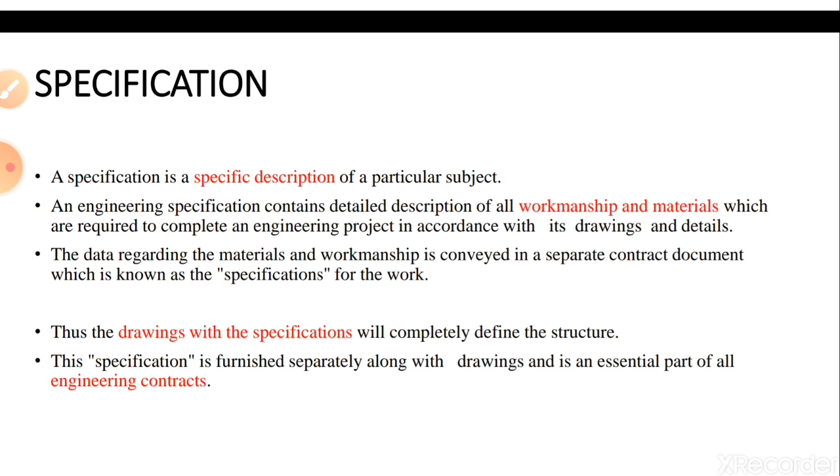So let us see why the specifications are required, or what are the necessities of the specifications.

First, the cost of a unit quantity of work is governed by its specifications. For each and every item, we are going to calculate the rates, and that is called the item rate of a work.

This item rate will be in terms of meter cube, sometimes meter square, sometimes in meters. And to calculate these item rates, we require a detailed specification for that work.

For example, if it is a cement concrete bed, the first thing required is the proportion. What is the proportion required for this bed? Whether it is 1:2:4, or 1:3:6, or 1:4:8.

Because for each and every proportion, the quantities of materials will change. If it is 1:2:4, we require more quantity of cement, whereas for 1:3:6, the quantity of cement will be reduced.

As the quantity of cement is reduced, the cost is also going to reduce. That's why we should clearly mention what should be the proportion.

Secondly, we have to give the thickness of the concrete bed. Again, if the concrete thickness increases, the quantity of cement and other materials also increases.

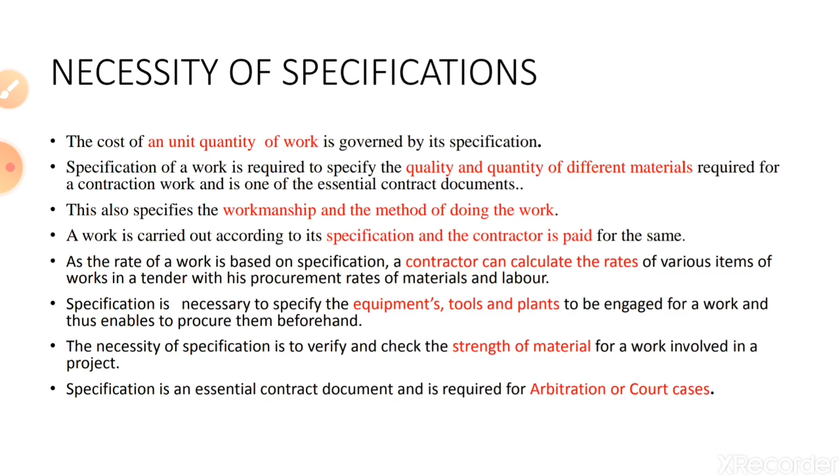That's why specification becomes an important document for any type of construction. For government projects, they will prepare the specification beforehand and give it to the contractor along with the tenders, so it's easy for the contractor. He can study the specifications and accordingly quote the rates, and those who quote less will get the job. That is called specifications.

The requirements for specifications are: specification should be clear and concise. Whenever we write the specification, whatever work should be done should be in a clear format so that the contractor will understand. If you write complicated words or complicated sentences, it is difficult for a layman or contractor to understand, and he will get confused. That's why it should be written clearly and in a concise form.

Whenever writing specifications, we should try to avoid repetition and unusual words so there won't be any ambiguity in construction. Ambiguous words such as 'suitable', 'proper', etc. should be avoided. We cannot write that a company's cement is suitable or not; that should not be written. It should be written clearly what company of cement or what strength of cement is required. Similarly, we should not write that using M20 grade concrete would be proper; that should also be avoided. We have to specify that you should use M20 grade of concrete, so there is no confusion in the workmanship.

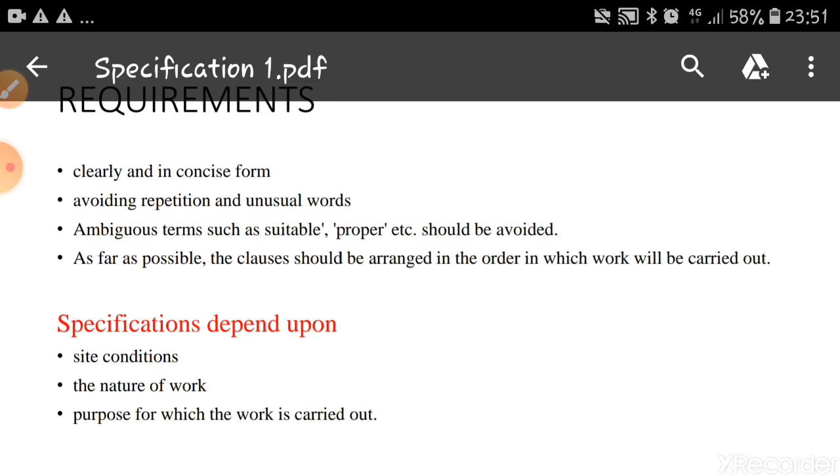The type of specifications. The specifications are classified into two categories. They are called general specifications and detailed specifications.

If you see any tablet or medicine bottle, some information will be written on that bottle - say these drugs will contain this many chemicals and these are the percentages. They are called general specifications. Similarly, whenever we purchase any item from a shop, some small information will be written on the packet - the manufacturing date, what should be the weight of that packet, what ingredients are involved. So they are all called general specifications.

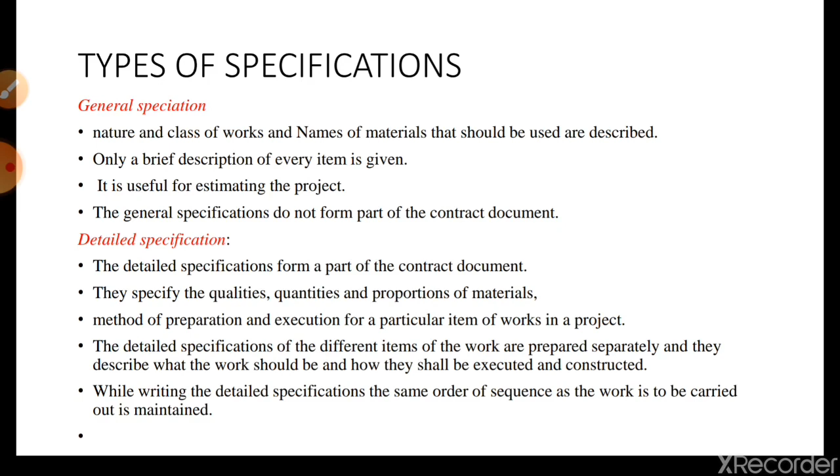They will not tell us how that item or drug has been manufactured, or what process is involved in that manufacturing. So those specifications are called general specifications. In civil engineering terms, general specification means it gives a brief idea about the materials - they will not give us anything in detail. If you see general specifications, the nature and class of the work and the name of materials that should be used are described. Only nature and class of work, say whether it's first class brickwork or second class brickwork. And name of materials indicates what names of materials are used, only that is specified - for example, cement or aluminium or paint. No description of materials is given in this topic. Only a brief description of every item is given, not a detailed description.

For example, if it is a foundation, you can write that first class brickwork in CM 1:6 is used for the foundations. We are not going to write the quality of bricks, the quality of cement, or the workmanship - nothing detailed is written in this. So it is useful for estimating the projects.

Sometimes we have to quickly estimate the project - in that case, these general specifications are essential. General specifications do not form part of the contract document because they do not contain anything in detail. Only a brief description is given here, so they do not become part of the contract document. If it is a part of the contract document, then all specifications should be written in detail. But since only a brief description is given here, they are called general specifications.

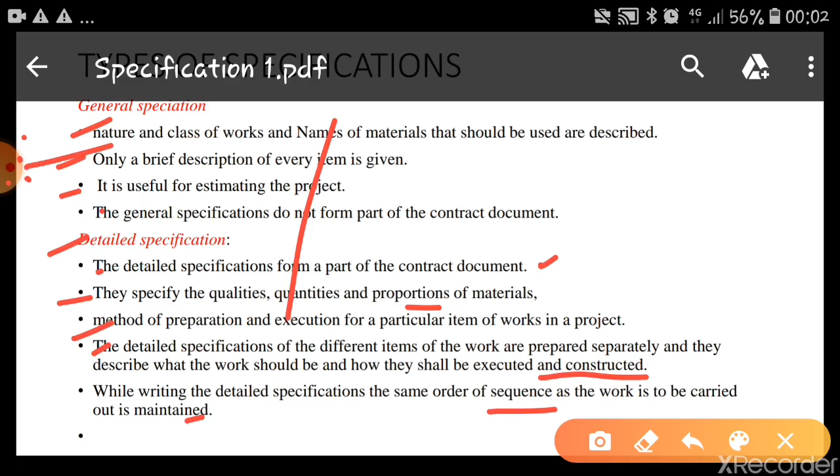Now let us see what are the general specifications of a first class building. Whenever we say it's a first class building, the building is constructed using good quality materials, with good workmanship and good supervision. That is called a first class building.

So when writing general specifications, we know that general specification means only a brief description will be given, nothing is explained in detail. So the construction starts with the foundation.

For foundation and plinth you can write: brickwork in foundation and plinth shall be of first class brick in cement or lime mortar over cement or lime concrete. This itself is enough for general specifications. We don't have to mention in detail what proportions are required for the bed concrete or for the brickwork; only briefly, within one line, you can finish the foundation and plinth.

If it is filling, then foundation trenches and plinth shall be filled up with coarse sand. If you are writing the detailed specification, you have to write the type of sand required, how the filling is done in different layers, and how it is compacted and consolidated. But in general specification, just one line: foundation trench and plinth shall be filled with coarse sand. That is sufficient.

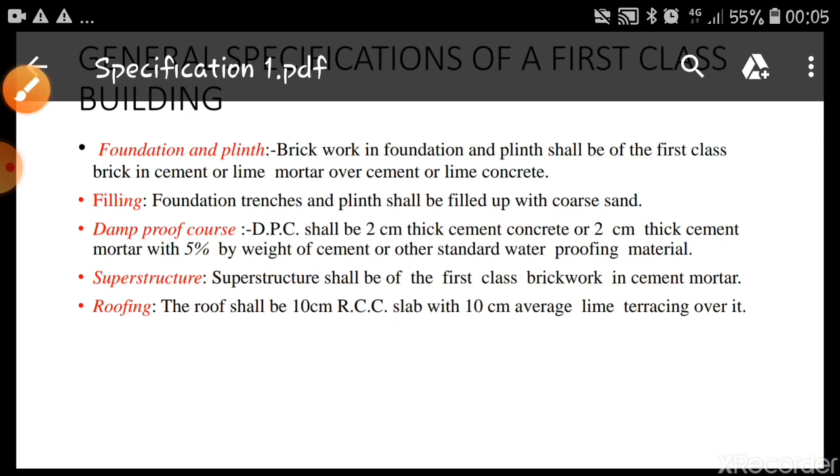Then if it is flooring, mosaic flooring shall be provided in drawing room, dining room, bathroom and water closet. Bedroom floor shall be colored and polished. Again, we don't have to write what type of mosaic is used, how it is laid, how many polishings should be done, or how many days of curing—only one line.

Similarly, finishing: inside and outside shall be 12 mm cement plastered. The inside of dining and bedroom shall be distempered and the rest whitewashed 3 coats. The outside shall be color washed over 3 coats of whitewash.

That itself is sufficient. For doors and windows, frame shall be seasoned teak wood and shutters 3 cm thick teak wood panelled. Brass fittings shall be provided. Doors and windows shall be varnished and French polished.

And the last one is miscellaneous items: rainwater pipe shall be of asbestos cement or cast iron finished with paint. All sanitary, water supply and electric fittings shall be of first class materials.

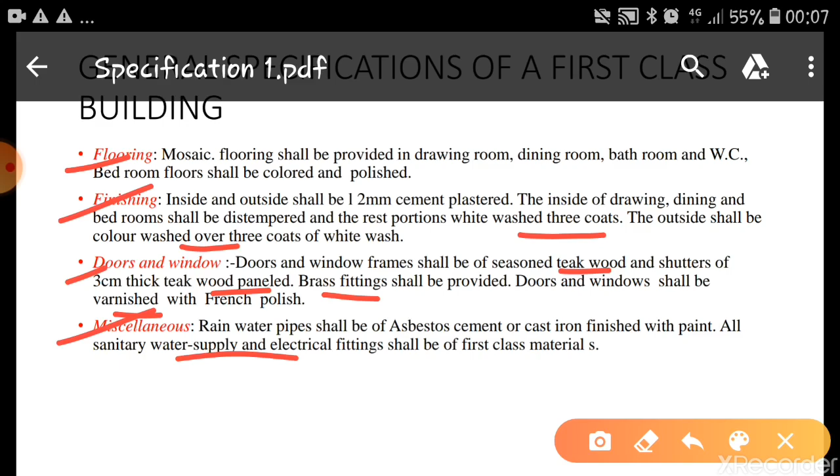So these are the general specifications for a first class building, because here all the materials used are of supreme quality. Whereas if you go for a second class building, the quality of some materials will reduce. Instead of teak wood doors and shutters, we can use some other wood like jack wood, or replace them with aluminum or other materials. Instead of mosaic or tiles, we can replace it with some other tiles. So slight changes will be there in second class buildings, and they are normally called the general specifications of buildings.

As we have seen the general specification of a first class building, now in the specifications we have to write about the quality of materials. Let us see what we can write about the materials. Let us start with the first class brickwork.

When we say bricks, there are different qualities of bricks available. Some bricks are called first class brick, some are second class, where the quality, size, and strength of the bricks will vary.

Whenever we say about the first class bricks, then bricks should be molded from good earth, free from all traces of salt. Should write this point clearly. Whatever brick should be molded, it should be from good earth, and it should be free from salts.

They should be of uniform deep red and copper color, thoroughly burnt without being vitrified. Since bricks are manufactured by burning, it should be thoroughly burnt so that it will get a deep red cherry or copper color.

They should be hard, sound, and of uniform size and shape, having each two adjacent plane surfaces at right angles. The sides of the bricks should have proper right angles, otherwise the joints will not be of the same pattern.

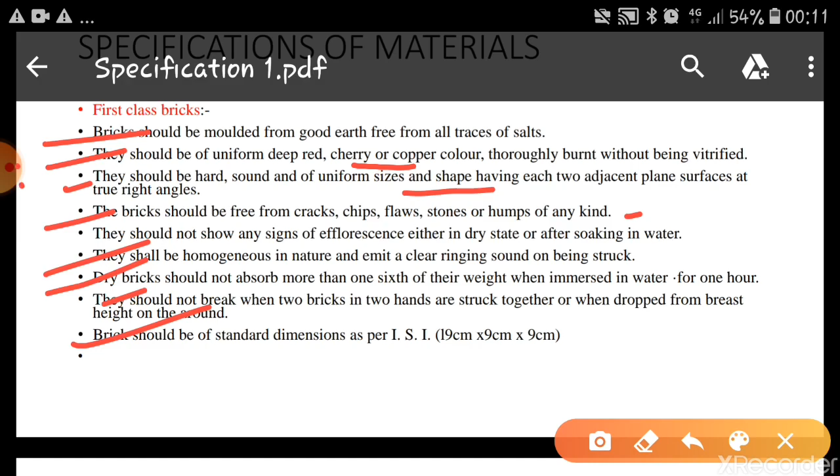Cement. The cement used for reinforced concrete works shall be either OPC, that is ordinary Portland cement, or rapid hardening Portland cement, or blast furnace slag cement, or high alumina cement of approved specifications. For normal works, ordinary Portland cement will be good. Otherwise, if it is a special situation, then we have to mention what type of cement is required.

Then we have to mention about the strength of the cement. The minimum tensile strength of ordinary Portland cement should be 175 kg per centimeter square after 7 days. Minimum tensile strength after 7 days should be 25 kg per centimeter square. Initial setting time should not be less than 30 minutes, and final setting time should not be more than 10 hours. So these are the general specifications we can write for cement.

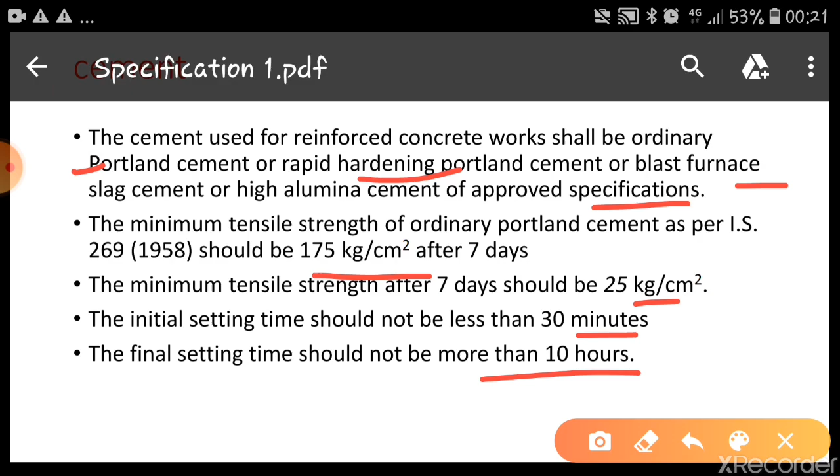Sand. The fine aggregates, that is sand, shall conform to IS 383 1963 or IS 515 1959. The sand should be clean, sharp, heavy, and gritty to touch. It should be free from clay, mica, vegetable, and other organic matters, and also from any foreign matters. So, whatever sand we are using should be free from all these impurities. Normally, river sand or pit sand is preferred as it does not contain any salt contents.

If a sample of sand contains more than 4 to 6% of clay, then it should be washed thoroughly. You can use it, but it should be washed first. Sand must be cleaned by screening before it is used. Sometimes sand will contain small pebbles, small stones, or other material, so it should be screened before it is used. Sand should be perfectly dry before it is used.

Otherwise, the bulking effect of sand must be taken into account. If the sand is wet, then because of bulking, we have to vary the amount of water required for construction. That's why if we are using sand, you should see that it is perfectly dry, so that whatever water ratio you have calculated can be maintained. Otherwise, we have to vary the water cement ratio.

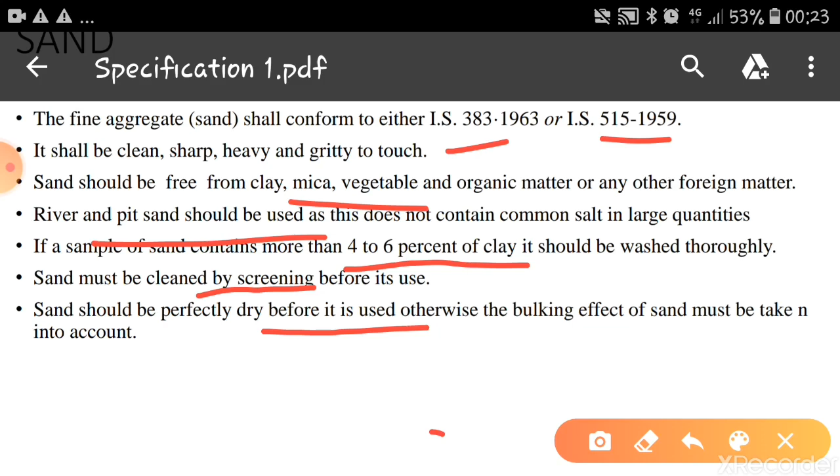Coming to water. Water is an essential ingredient for construction of any structure. It is required for mixing of cement, sand and aggregates, or it is required for curing purposes. So in concrete works, water is used for both mixing and curing, and it should be free from injurious amounts of deleterious materials. Simply put, potable water which is fit for drinking can be used for construction purposes.

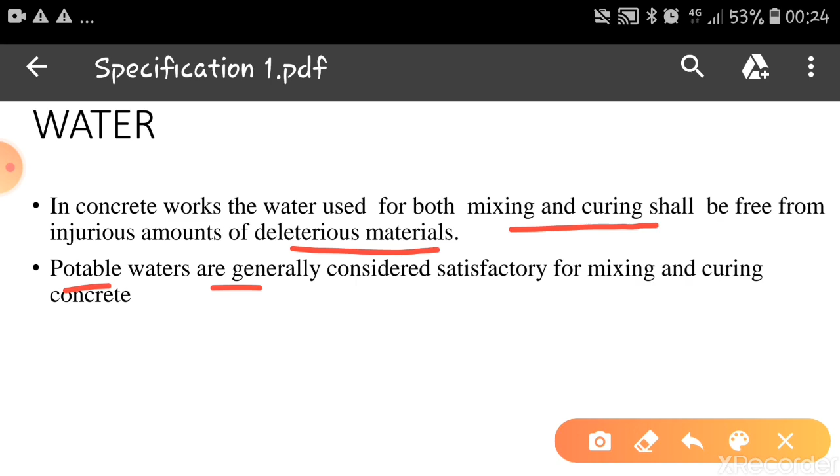Reinforcement. The reinforcement shall be mild steel and medium tensile steel wires conforming to IS 432 1960, or cold twisted steel bars conforming to IS 1786 1961, or deformed steel conforming to IS 1139 1959.

All reinforcement shall be clean and free from loose mill scales, dust, loose rust, and paints.

Welded joints in reinforcement may be used, but in all cases of important connections, tests shall be made to prove that the joints are of the full strength of bars connected. Welding of reinforcement shall be done in accordance with the recommendations of relevant Indian standards for welding of mild steel bars used in reinforced cement concrete.

Normally, the steel which is used should be free from all these impurities like dust, loose rust, paints, oils, and other things. And if it is required to do the welding, then it should be done according to the IS standards.

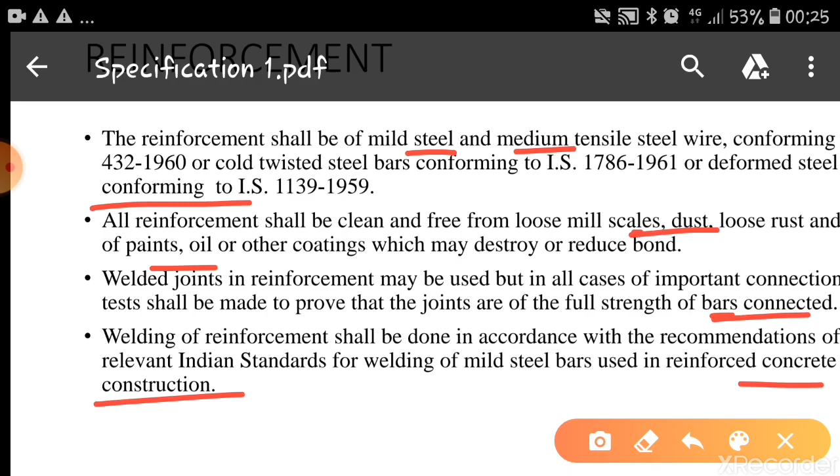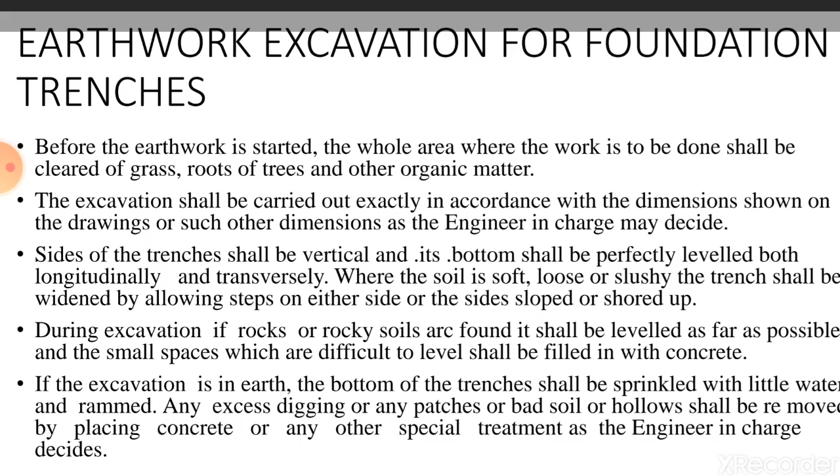So these are the specifications of materials. Now we'll see a step-by-step procedure for each and every item required in the construction. The first item of any construction is earthwork excavation. So now we'll see what are the specifications required for earthwork excavation for foundation trenches.

Before starting the excavation work, the whole area where the work is to be done should be cleaned of grass, roots of trees and other organic matters, because before construction we have to mark the foundation sites, and to know the foundation site it is required that we should clean the site. If there is any bushes, if there is grass, everything should be leveled and the site should be cleaned.

The second step is that excavations will be carried out exactly in accordance with the dimensions given on the drawings, or other dimensions as the engineer in charge may decide. So we have to do the excavation only with the specified sizes given in the drawings, or if there are any changes, the site engineer may specify them, and the excavation will be done according to those sizes. We should not do this excavation for the entire site or other areas.

Sides of the trenches shall be vertical and its bottom perfectly leveled both longitudinally and transversely. This is a very important criteria. Whenever we do the excavation, we should see that the sides should be perfectly vertical and the bottom should be perfectly horizontal. When the soil is soft, loose or slushy, the trench shall be widened by allowing steps on either side, or the sides sloped or shored up.

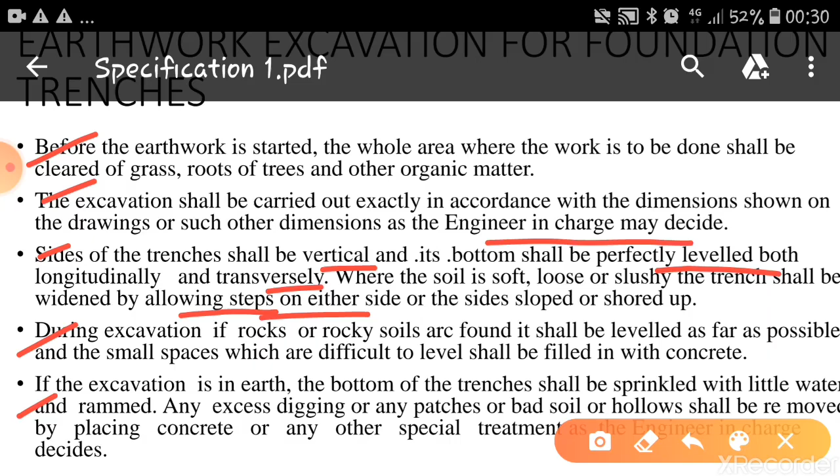Water in trenches must be bailed or pumped out, and where it is apprehended that the sides may fall down, arrangements shall be made for adequate timber shoring. If we are doing the excavation in waterlogged areas, there is always a risk that the sides may collapse. So to protect the sides, timbering should be done, and we have to protect the sides so that there won't be any collapse during excavations.

When it is specified that the work is to be carried out without removing pipes, cables, sewers, etc., all of them should be temporarily shored and saved from any damage. If there is a pipeline, maybe a water line or sewer line, then we should see that there won't be damage to those pipes and sewers. Care should be taken to protect these pipes and sewer lines.

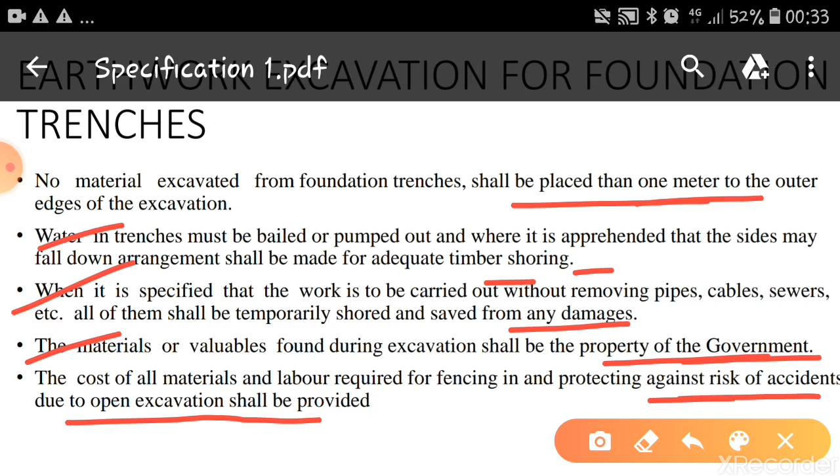So these are the specifications required for earthwork excavation in foundations, and noting all the specifications, the rates should be quoted. Tomorrow we can't say that we have not read the specifications properly and we have quoted less, so we want to increase the rates. That will not be possible. Since all the descriptions are given here in detail, we have to provide the rates considering these specifications, and they will form a contract document.

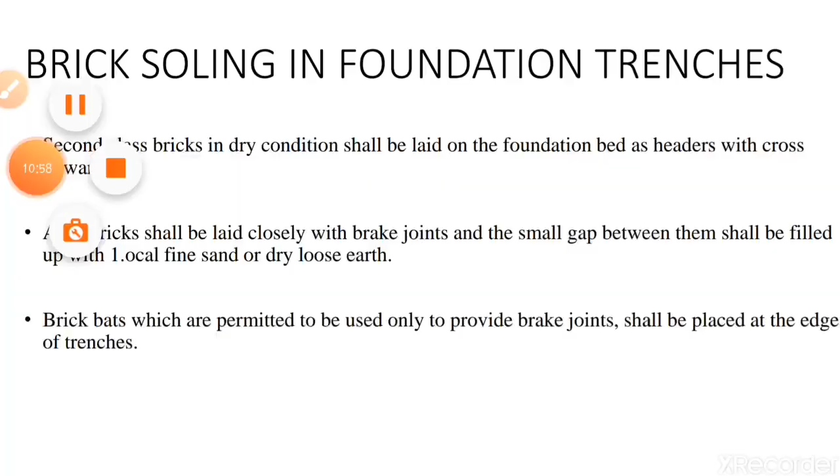Coming to the second aspect, that is called brick soling in foundation trenches. Sometimes if the soil is loose, then we have to provide a layer below the foundation, and that is called brick soling. The procedure is: second class bricks in dry condition shall be laid on the foundation bed as headers with cross upwards. So we can use second class brickwork for the soling, laid on the foundation bed as headers with cross upwards.

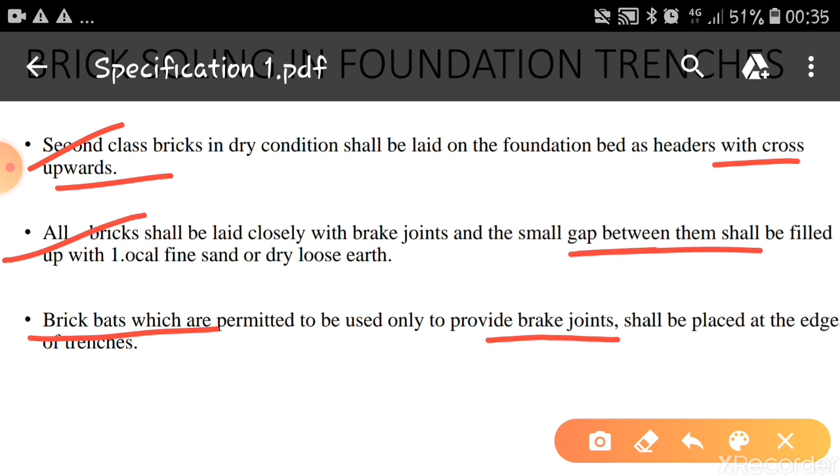All brickwork shall be laid closely with break joints, and any small gap between them shall be filled up with local fine sand or dry loose earth. As far as possible there should be no gap, but if a small gap is found, it should be filled with local sand or dry loose earth. Brick bats, that is pieces of bricks, are permitted only to provide break joints, or shall be placed at the edges of the trenches. Once they are placed neatly, they should be rammed so that we get a hard foundation bed, and above that the foundation is provided. This is called brick soling for foundation trenches.

Next item we are going to discuss is cement concrete in foundation bed. Normally after excavation, and after doing the soling coat, we provide the foundation bed, which will be of cement concrete.

To write the specifications for cement concrete, first we have to specify what type of materials are used for the concrete: coarse aggregates, fine aggregates, cement, and water. We have to describe these materials - what should be their quality and strength. Then we should specify how to mix these ingredients, how to take the quantity of coarse aggregates, fine aggregates, cement, and water, and how to mix them. The third thing is how to lay them on site, how to vibrate them, how to protect them, and later how to cure them. We have to write detailed specifications for all these aspects.

Let us begin with the materials. To prepare cement concrete we require coarse aggregates, fine aggregates, cement, and water. The coarse aggregates shall be of the hardest available type, such as granite, gravel, or broken stone, as specially mentioned, and they should be free from dust, dirt, soft material, vegetable matter, etc. It should be well graded from 2.5 cm down to 10 mm. They should be of the hardest quality and free from dust, dirt, soft material, vegetable matter, etc.

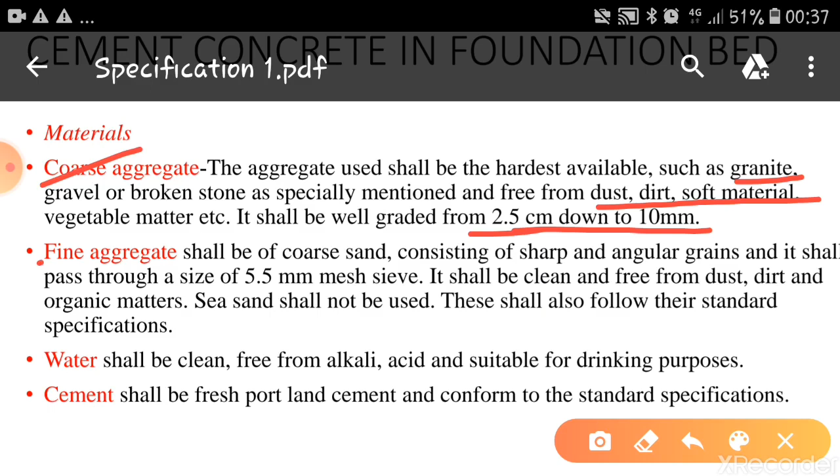Coming to fine aggregates, they shall be of coarse sand consisting of sharp and angular grains, and should pass through a 5.5 mm mesh. It should be clean and free from dust, dirt, and organic matter. Sea sand shall not be used, because sea sand contains salts which are dangerous for construction. That's why sea sand should be avoided as far as possible. This shall also follow the standard specifications.

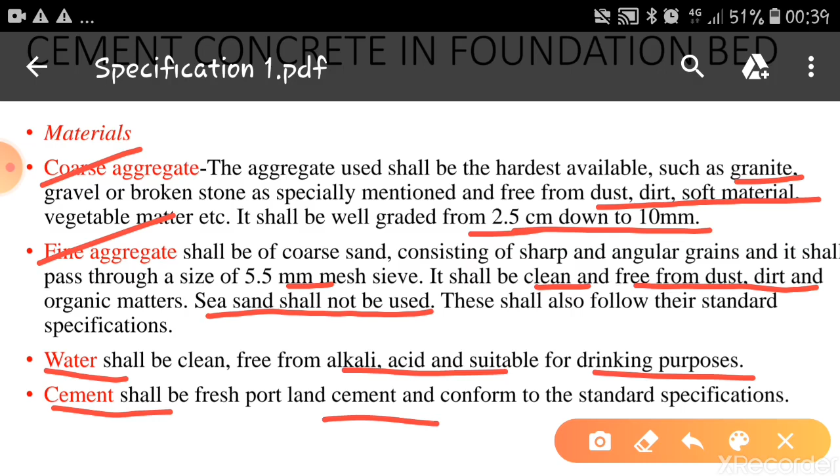Cement: whenever we write specifications for cement, we should state that it should be fresh Portland cement conforming to standard specifications. We cannot give brand names here - we should not specify any brand names, only that it should be fresh Portland cement conforming to standard specifications. Water should be clean, free from alkali and acid, and suitable for drinking purposes. When you say potable water, whatever water is fit for drinking can be used for construction.

Next aspect is proportioning of concrete - how to take up the various weights of aggregates and proportion them. Proportioning of cement, sand, and coarse aggregate shall be 1:2:4, 1:3:6, or 1:4:8 as specified. When we say 1:2:4, it means 1 part cement, 2 parts fine aggregate, and 4 parts coarse aggregate - this is volume batching. Similarly, for weight batching, 1 bag of cement weighs 50 kg, fine aggregate should be 100 kg, and coarse aggregate should be 200 kg. That is called weigh batching.

Coarse aggregates and sand shall be measured by gauge boxes of suitable size, that is 35 into 25 into 40 centimeter, while cement shall be taken by bag weighing 50 kg or a volume of 0.035 cubic meters. Normally at site we do volume batching, and this should be done according to the volume of 1 bag of cement, which equals 0.035 cubic meter. That's why we prepare boxes whose volume is 0.035 cubic meter, so it becomes easy to proportion the coarse aggregate and sand.

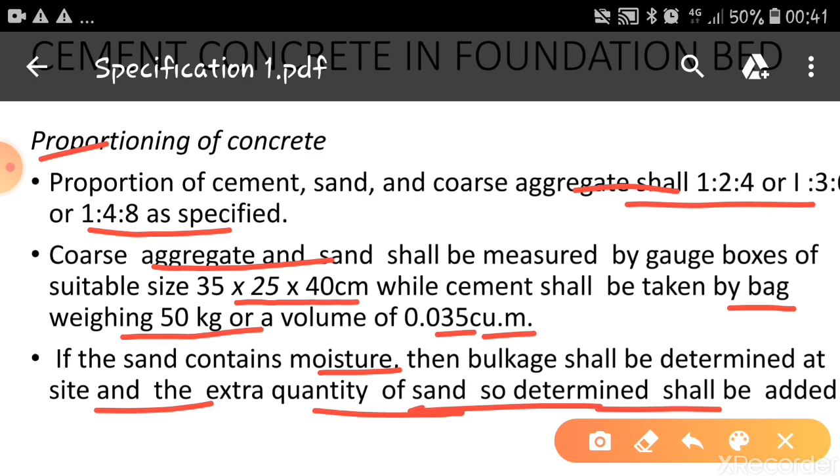If the sand contains moisture, bulkage shall be determined at the site and the extra quantity of sand so determined shall be added. This is important when there is moisture content in the sand. If the sand is dry, we don't have to consider this factor. Whereas if it contains moisture, we have to calculate the bulking of the sand, and accordingly take extra quantity of sand.

Coming to mixing of concrete. The mixing of concrete can be done either by hand or by machines. For smaller works, hand mixing will be permitted. Normally, for all structural concrete of proportion 1:2:4 or 1:3:6, it shall be mixed in mixing machines. If you are providing a slab, the concrete shall be mixed using machines only. If you are providing bed concrete, hand mixing is permitted. For small quantities, when hand mixing is permitted by the engineer in charge, extra cement of 10% over the standard requirement is added, and that provision should be done by the contractor at his own cost. He cannot claim it at the end.

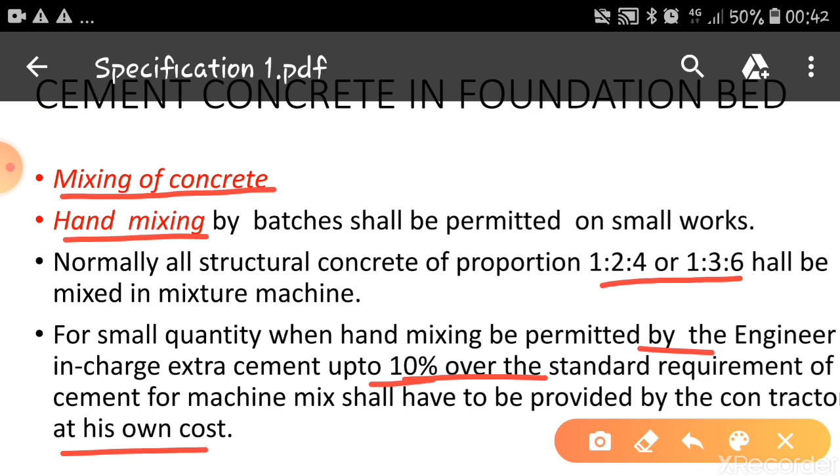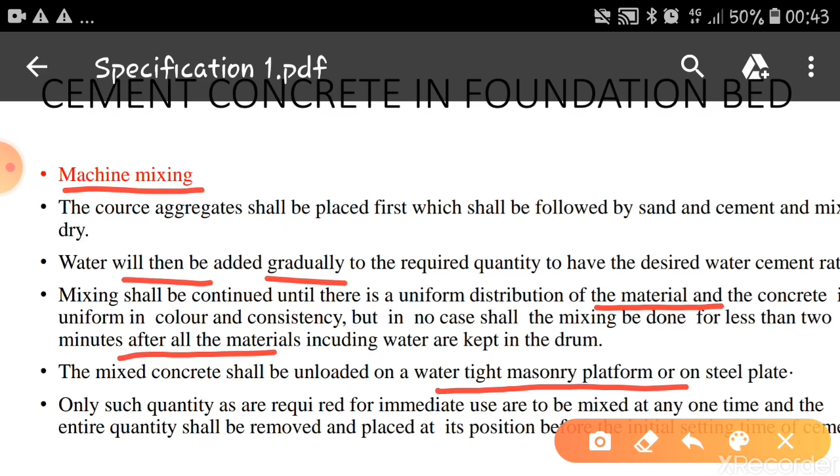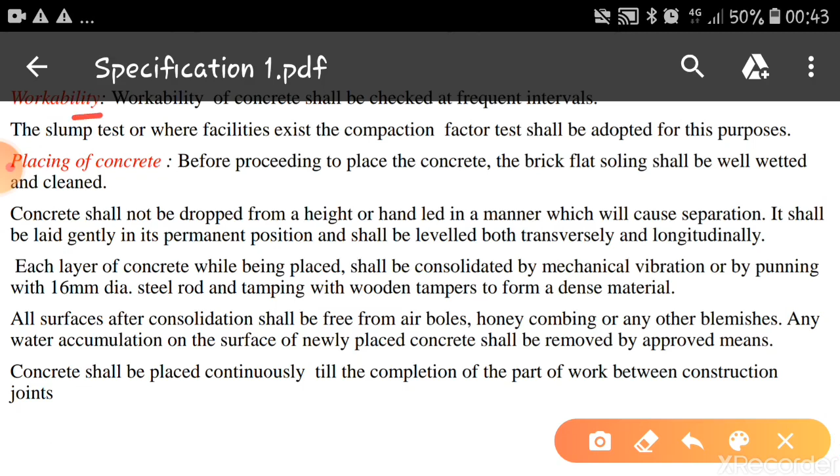Workability. Workability of concrete shall be checked at frequent intervals. We can check the workability using the slump test, and this should be done frequently to see the workability. The slump test, or where facilities exist, the compaction factor test, shall be adopted for this purpose.

Next is placing of concrete. Before proceeding to place the concrete, the brick flat soling shall be well wetted and cleaned. If you don't provide water for the brick flat soling, there are chances it will absorb water from the concrete, leaving less water in the concrete. That's why, to avoid that, we first sprinkle water on the brick flat soling.

Concrete shall not be dropped from a height or handled in a manner which will cause separation. You have to see that there won't be any separation of coarse aggregate, fine aggregate and cement. It shall be laid gently in its position and shall be levelled both transversely and longitudinally.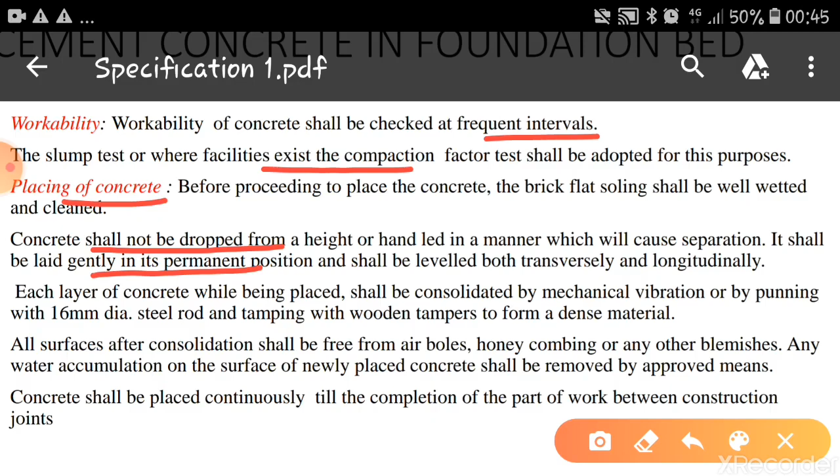Each layer of concrete, while being placed, shall be consolidated by mechanical vibration or by punning with a 16 mm dia steel rod and tamping with wooden tampers to form a dense material. Vibration will be done either by using a mechanical vibrator or by a 16 mm dia steel rod. All surfaces after consolidation should be free from air boles, honeycombing or any other blemishes. Any water accumulation on the surface of newly placed concrete shall be removed by approved means.

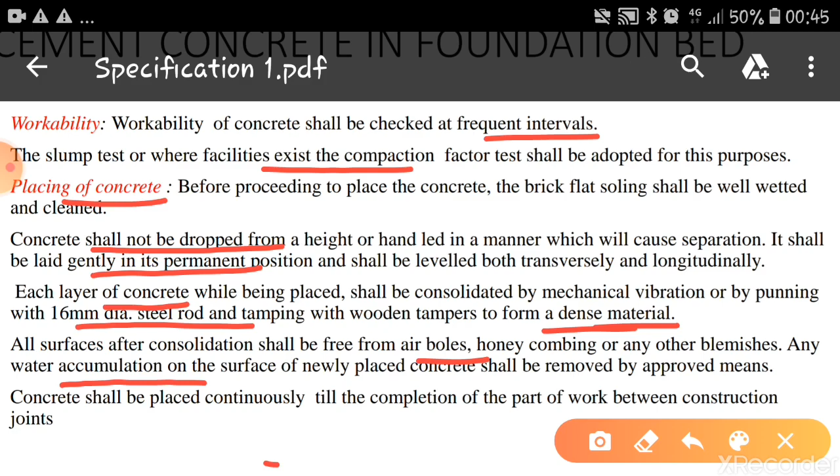Concrete shall be placed continuously till the completion of the part of work between construction joints.

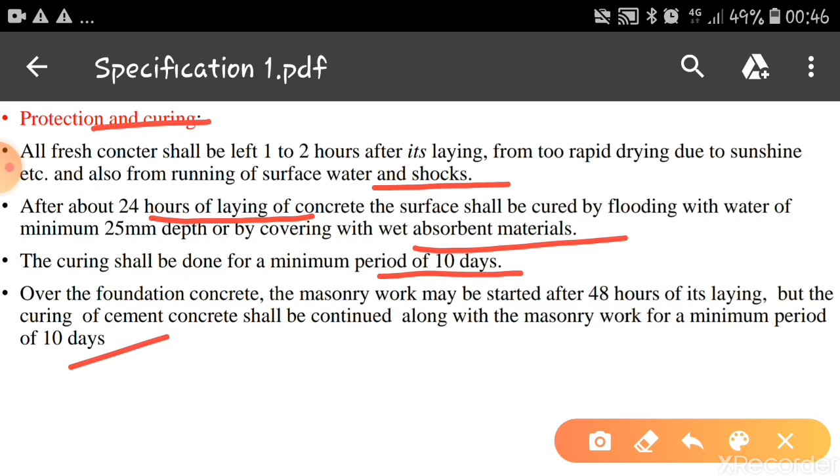Over the foundation concrete, the masonry work may be started after 48 hours of its laying, but the curing of cement concrete shall be continued along with the masonry work for a minimum period of 10 days. So these are the specifications required for cement concrete bed for foundations, and the rates for cement concrete bed will be calculated based on these specifications.